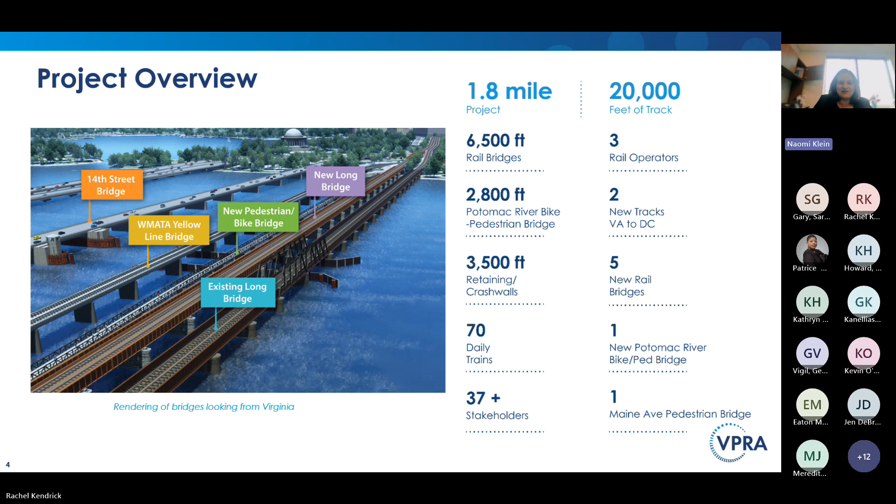This project starts in Arlington, and ends just south of L'Enfant Station, expanding the rail corridor to 4 tracks. South of the Long Bridge project, we have another project, Alexandria 4th track, which will expand from 3 to 4 tracks. North of the project, we have the L'Enfant Station and 4th track project, which will also expand the corridor to 4 tracks all the way up to Union Station. So you have a unified 4-track corridor from Alexandria all the way up to Union Station, and then the 4 tracks continue up the northeast corridor.

I talked about the Long Bridge across the Potomac River, but this project is actually more than that. It's actually 5 rail bridges and 2 bike or pedestrian bridges. Going over where those bridges are: we've got a bridge over George Washington Memorial Parkway, over the Potomac River, over the I-395 highway, over Ohio Drive, the Washington Channel, Maine Avenue, and then ending just south of L'Enfant Station.

Because of the size and scale of this project, it is broken up into 2 packages for construction. There is a south package, and that will build everything that is in Virginia and the bridge across the Potomac River. The south package ends right as you enter East Potomac Park, closest to the water. The south package will also build the bike pedestrian bridge. That package is a design build contract. The design builder started at the beginning of this year, and construction is estimated to start in the middle of next year.

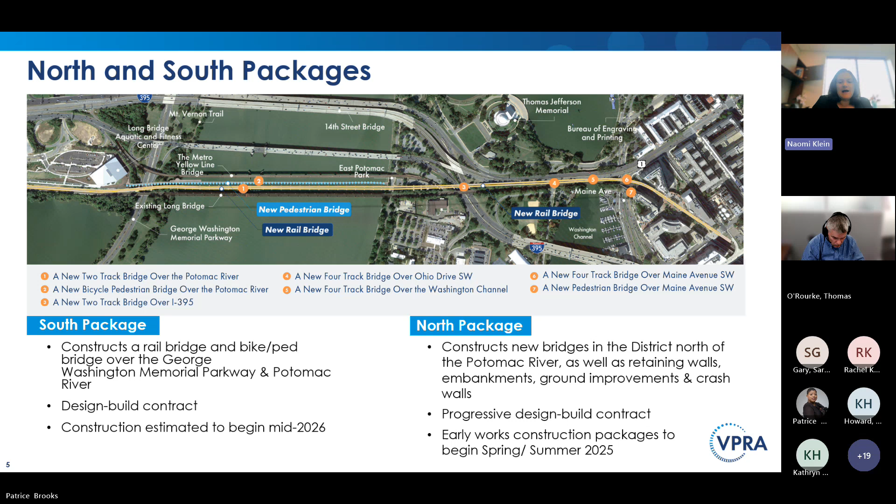The north package, which is what we are here to talk about today, picks up in East Potomac Park right by the water, and continues the project north over I-395, over Ohio Drive, and the Washington Channel, over Maine Avenue, and then through the Maryland Avenue overbuild, where it ends at LE Interlocking. That north package is progressive design build. We are currently in final design, and we are starting early works construction packages. We're not building any of the actual rail infrastructure yet, but doing early work that will help us get ready for full construction. The full construction work is expected to start next year, and those early works packages are starting now.

We have a lot of stakeholders. For those of you who live in the DC metro area, you know our federal partners are all around us. Additionally, because this project is between DC and Virginia, we work with both our Virginia partners and our district partners, so District Department of Transportation and VDOT. We also work with our rail operators, Amtrak, VRE, and CSX, and FRA, the Federal Railroad Administration. We also work with bike and pedestrian advocates in the district and Virginia, and we have design oversight by the National Capital Planning Commission and the Commission of Fine Arts. Then we get permits from many of the federal entities listed here, and state.

This project is a huge value add for the district. We've already talked about one of the biggest things, which is the new bike pedestrian bridge over the Potomac River. The current path across the Potomac River is attached to the 14th Street Highway Bridge, and it's 7.5 feet wide. The new dedicated bike pedestrian bridge will be 16 feet wide, more than double the current path. In addition to that bike pedestrian bridge, we're adding additional safety and security features. We're improving the vertical and horizontal clearances of many of the rail bridges. This is important because low bridges carry a higher risk of bridge strikes from large vehicles like trucks and freight.

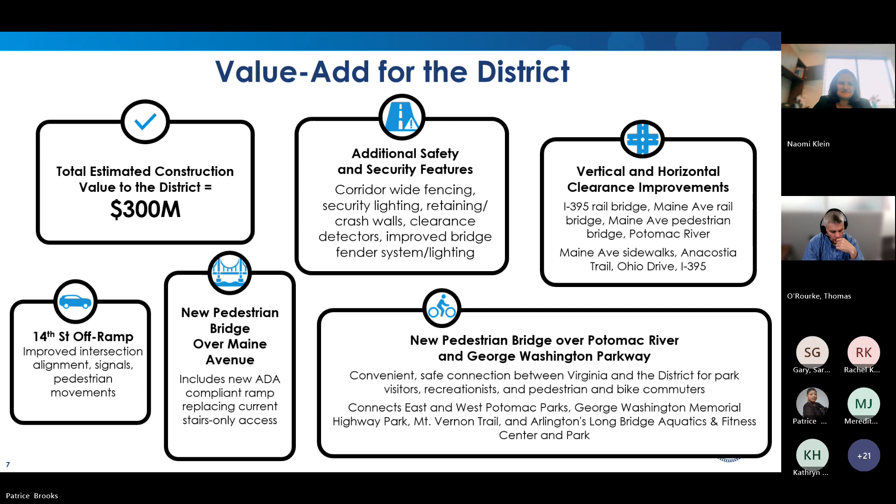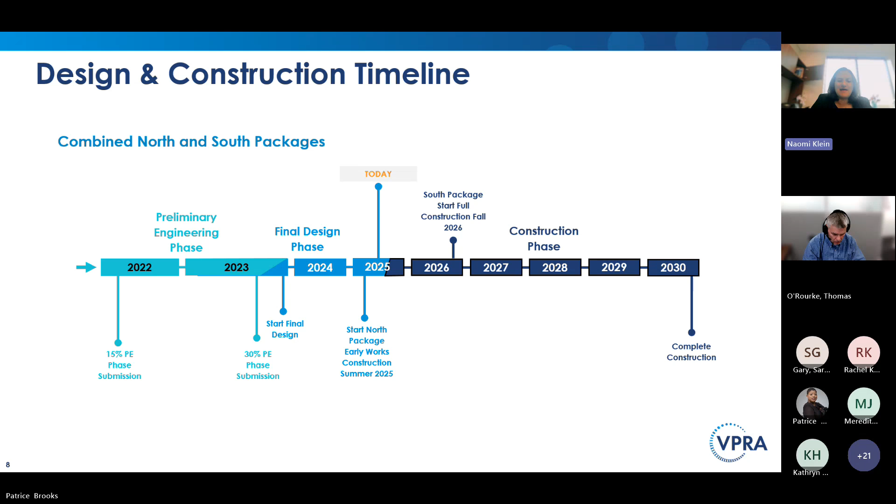This is our design and construction timeline, showing where we've been and where we're going. In 2022, VPRA became the lead on the project. Prior to that, DDOT was the lead on the environmental document, working in partnership with the Federal Railroad Administration. In 2023, the design of the project was taken from 15%, considered conceptual design, to 30%, which is preliminary engineering. Then our progressive design builder came on board and is taking that to final design, expected by this fall. We're doing early work starting now, spring and summer, with full construction estimated to start towards the middle of fall next year, lasting 5 years through 2030.

Next slide, please. This is just to show you that we are fitting a lot of infrastructure into a very small space. From left to right, you'll see the existing WMATA bridge. That green box above it is their air rights, so we cannot put any structures within their air rights.

Next to that, you'll see our new bike pedestrian bridge, 16 feet wide, more than double the current connection. That bike pedestrian bridge connects in 3 places — 2 on the Virginia side, 1 on the DC side. It connects with the Long Bridge Aquatic Center Trail, the Mount Vernon Trail, and in DC, the bike lanes on Ohio Drive in East Potomac Park.

There is a ramp down to the Mount Vernon Trail, which is ADA accessible and also very easy for bikes to use. Then 25 feet away from the bike pedestrian bridge is the new rail bridge, and 25 feet away from that is the existing Long Bridge, which will continue to be owned and operated by CSX.

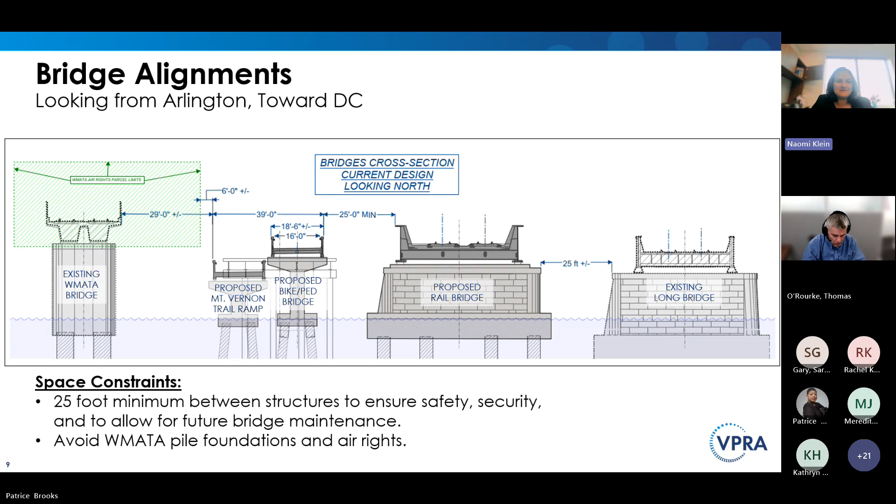Next slide, please. This shows you some renderings. On top is the existing Long Bridge, which is over 100 years old. On the bottom, the existing bridge is on the left next to the proposed new bridge on the right. The aesthetics of these structures are reviewed and approved by the Commission of Fine Arts and the National Capital Planning Commission.

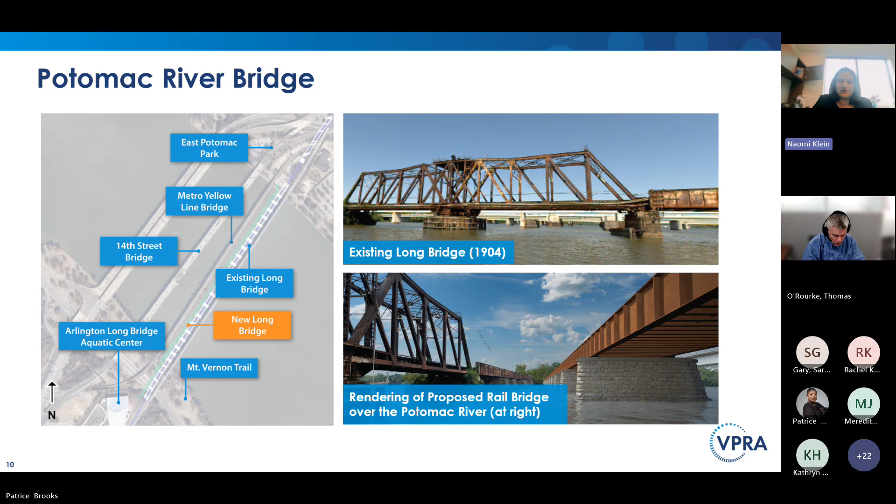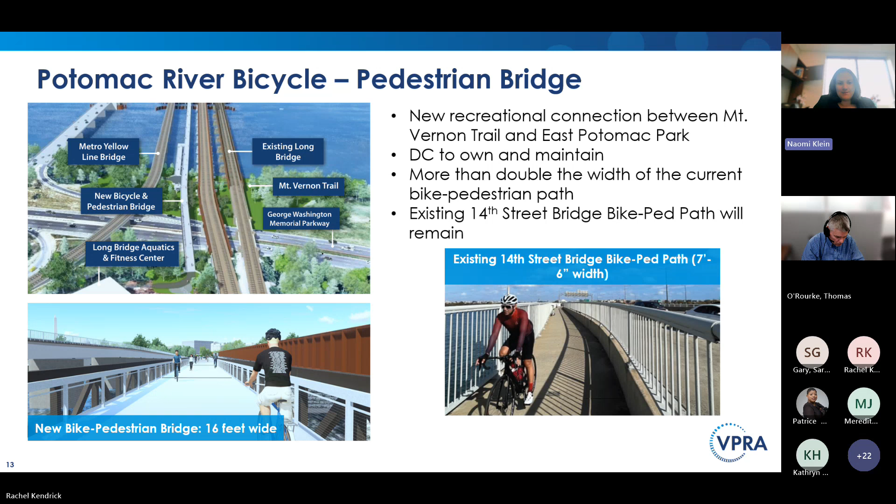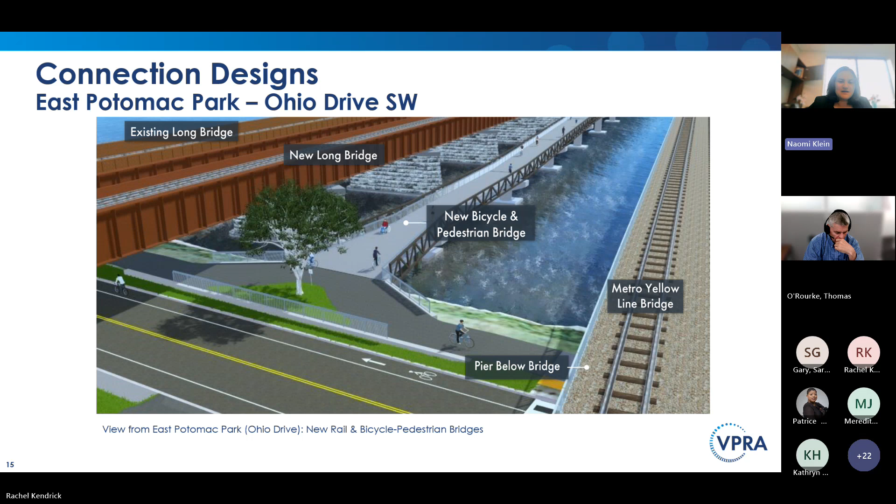There is a pedestrian bridge over Maine Avenue. That bridge used to be a rail bridge leading to a rail yard, which is now the Maryland Avenue overbuild, where you'll find the Salamander Hotel, formerly the Mandarin Hotel, and the Portals development. When the Maryland Avenue overbuild was developed, that rail spur was turned into a pedestrian bridge, I believe back in about 2007.

That bridge is right in the location where the new 2 tracks of rail need to go, so it will have to be removed. But we are planning to replace it right next to the new 4-track rail bridge. That bridge is privately owned by the PPIA, the Portals Public Improvement Association, a nonprofit made up of business owners on the Maryland Avenue overbuild. We've worked closely with them, the National Capital Planning Commission, and the Commission of Fine Arts on the design of the replacement pedestrian bridge.

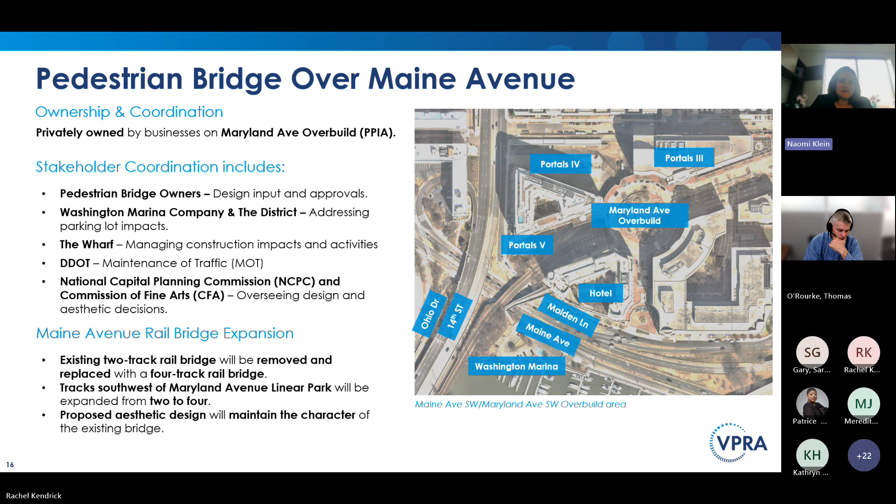This shows the new 4-track rail bridge from an aerial view, and the new pedestrian bridge over Maine Avenue. One distinction worth making, since it can be confusing: the bike pedestrian bridge we're building over the Potomac River does not connect to this pedestrian bridge. They are two entirely separate structures. The only reason we are building this pedestrian bridge is because we have to remove the existing one. It's unrelated to the new bike pedestrian bridge over the Potomac River that lands in East Potomac Park—this is a completely separate structure that just brings you across Maine Avenue.

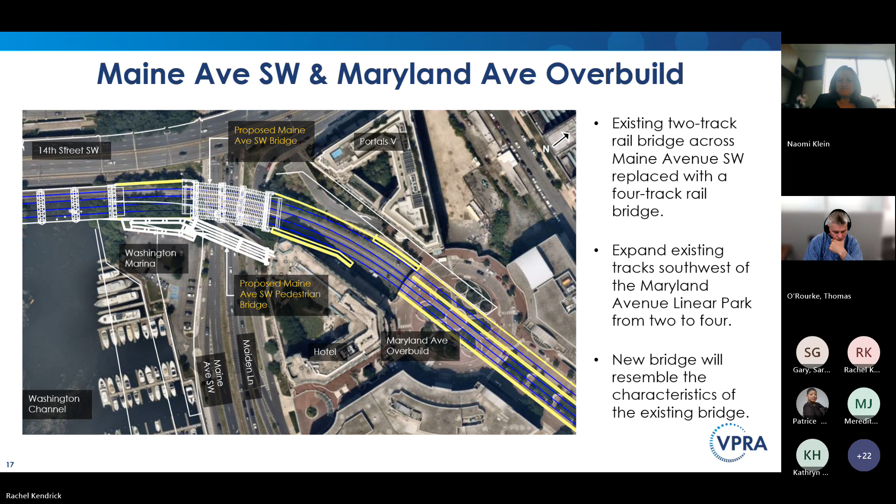This shows what the new pedestrian bridge over Maine Avenue will look like. As mentioned earlier, currently the landing of this bridge near the Washington Marina parking lot on Maine Avenue only has stairs and is not ADA accessible. Because we are replacing it, we are including an ADA accessible ramp, as well as stairs for people who want a shorter, more direct connection. This does require a little bit of land acquisition from the Washington Marina parking lot, so we've redesigned that parking lot to ensure they keep the same number of parking spaces as before.

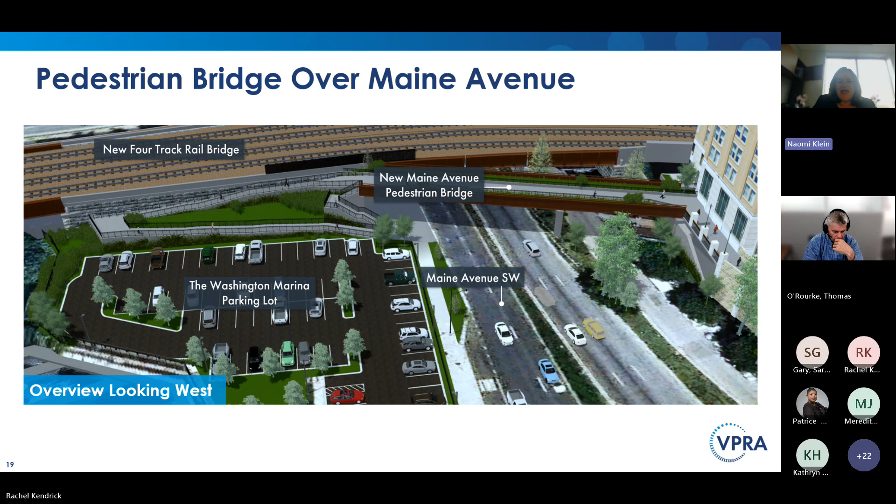This is a rendering of what it will look like from the new Maine Avenue pedestrian bridge.

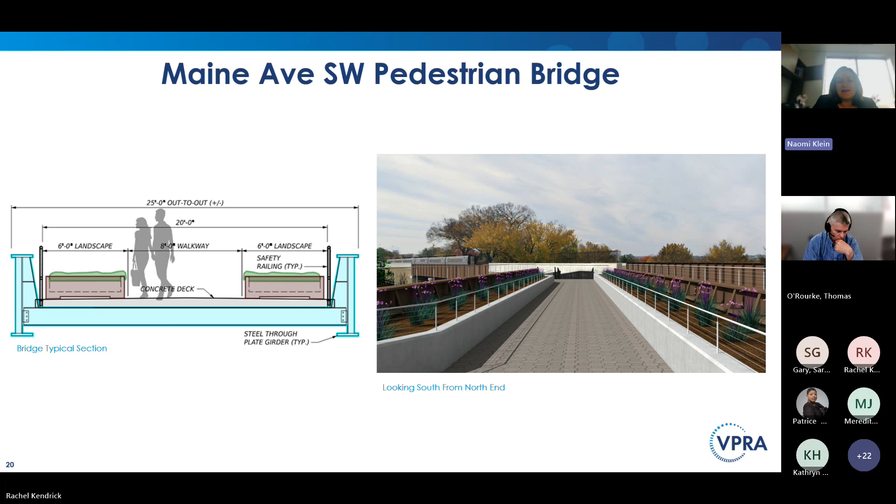This bridge is highly used during cherry blossom season. We've included the same planter boxes that existed before, but the bridge is also wider than the existing pedestrian bridge.

So what is happening now in the area? We are doing archaeological testing, vibration monitoring, borings and test piles. Essentially, we're testing the soil to help inform the final design to make sure the bridge will hold up for 100 years, which is the service life of the bridge.

We are doing tree and brush clearing. These are the early works I was referring to that help us prepare for construction next year.

We are also working on our traffic plans. We are building something in a major urban area, and we have to build structures over roadways, so we can't do that without some amount of disruption to traffic. We work closely with DDOT and our other partners to make sure those plans are as least disruptive as possible.

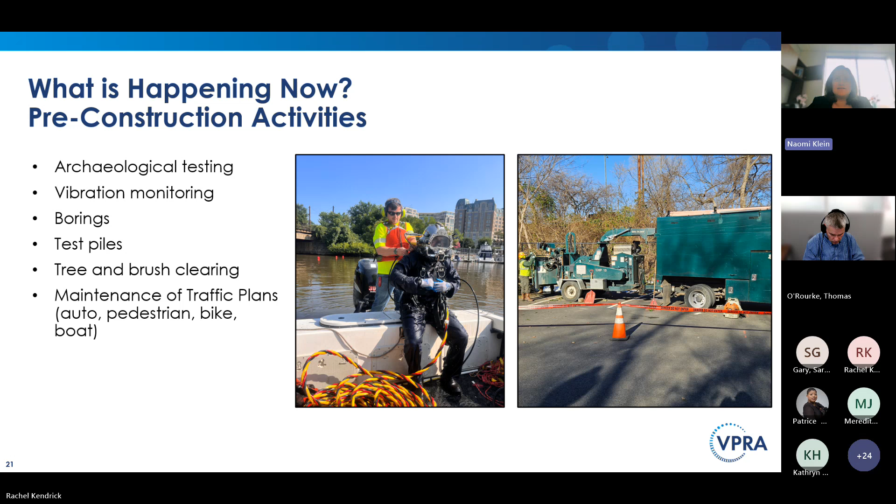On that topic, stakeholder coordination: we coordinate very closely. You saw many slides before with a visual of all our stakeholder logos. We have many stakeholders that we work with on a regular basis.

We have weekly and monthly meetings to make sure we have clear communication about what's going on throughout the course of the project as we get closer to construction, including regular meetings with rail operators, DDOT, the National Park Service, and adjacent property owners. These are all stakeholders we've been meeting with regularly for years to make sure that when we get underway with work, there are no surprises.

Obviously, we will never 100% reach every person who will be impacted by the project, but it is our goal to make sure the information is out there and that we've been coordinating throughout the entire process, every step of the way. Some of the topics we meet about, not comprehensive: traffic and travel flow, noise and vibration, the structures themselves and their design, utilities, inspections and permits, and adjacent projects and special events.

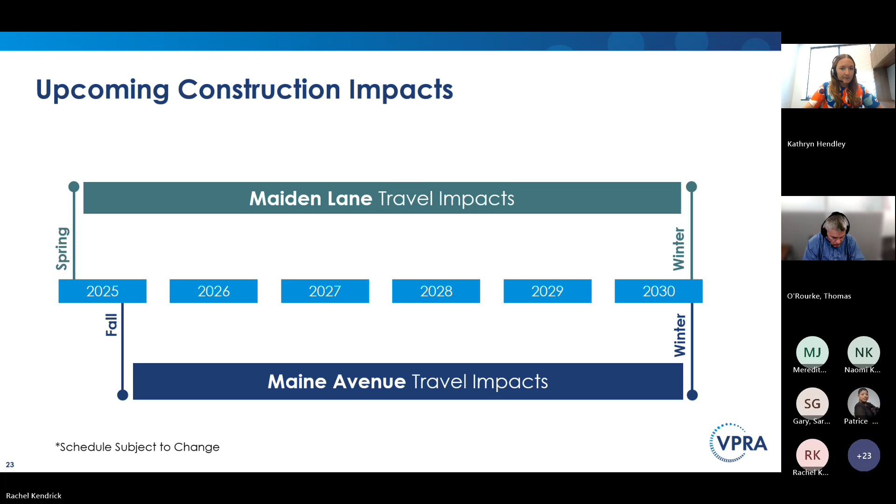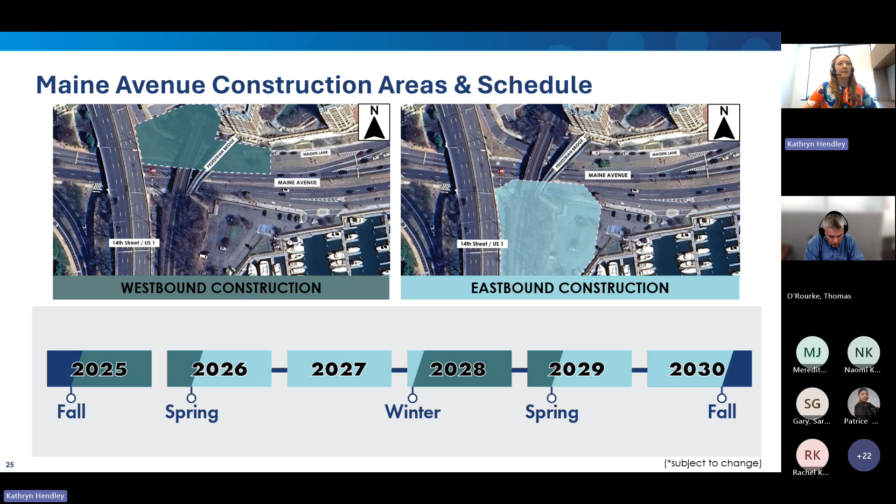The schedule at the bottom of the slide associates the colors of the construction areas with the approximate timeframes of when these phases will be under construction. Construction for the dark green westbound zone will start later in 2025 and run until spring 2026. Then we will flip to the eastbound construction zone, which will be in place until early 2028. In early 2028 we will convert back to the westbound zone for approximately a year until 2029, and then again convert back to the eastbound zone. We'll be flip-flopping in order to construct this very complex Maine Avenue rail bridge and pedestrian bridge.

The big picture goal of implementing these changes to Maiden Lane and Maine Avenue is safe access for motorists, bicyclists, and pedestrians throughout construction. This is a very busy corridor, so our goal is safe access for travel to the Salamander Hotel, the Washington Marina, the Portals, and the passenger rail and freight corridor, as well as streamlining construction and minimizing impacts as much as we can.

A few other things to note: there will be a need for occasional nighttime lane closures and weekend detours throughout the project. A portion of Maiden Lane will be closed to maximize safety during construction, and the northbound 14th Street ramp will be closed for limited periods. Importantly, pedestrian access will be maintained across Maine Avenue throughout construction. We will build a temporary pedestrian bridge slightly further east from where it is today, closer to the marina entrance, but pedestrian access will always be maintained from the Salamander and Portals to the marina parking lot area.

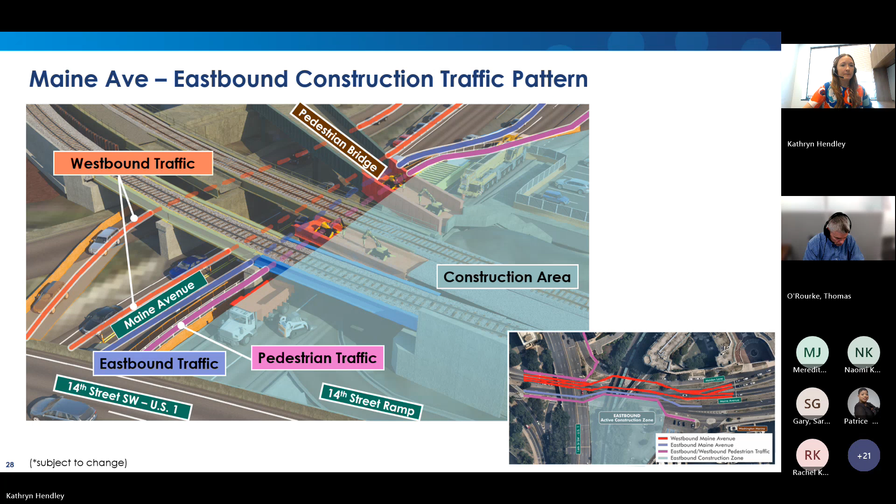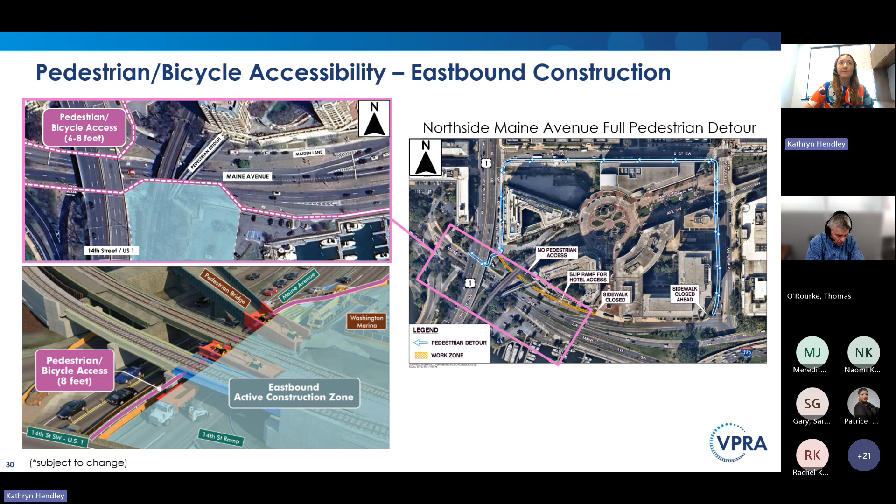First and foremost, there will be continuous pedestrian access throughout the project. Pedestrian access will always be at least 6 feet wide at all times, and along the eastbound roadway, the bike-ped access will actually double during the cherry blossom season. As mentioned, this sidewalk is part of the Anacostia Riverwalk Trail, and we know that bike and pedestrian traffic in this area increases substantially during cherry blossom season, so we will be doubling bicycle and pedestrian capacity during that time.

To sum things up for both the westbound and eastbound construction zones and traffic patterns we walked through today: the lines on the graphics represent the number of travel lanes in place during each construction phase. Red lines are westbound Maine Avenue travel lanes, purple lines are eastbound travel lanes, and pedestrian routes are shown in pink. In the westbound construction phase, shown in dark green on the left, we will maintain 2 travel lanes in both directions. In the eastbound construction phase, shown in teal on the right, we will maintain 2 lanes westbound and 1 lane eastbound. There will be continuous pedestrian access throughout both phases of construction.

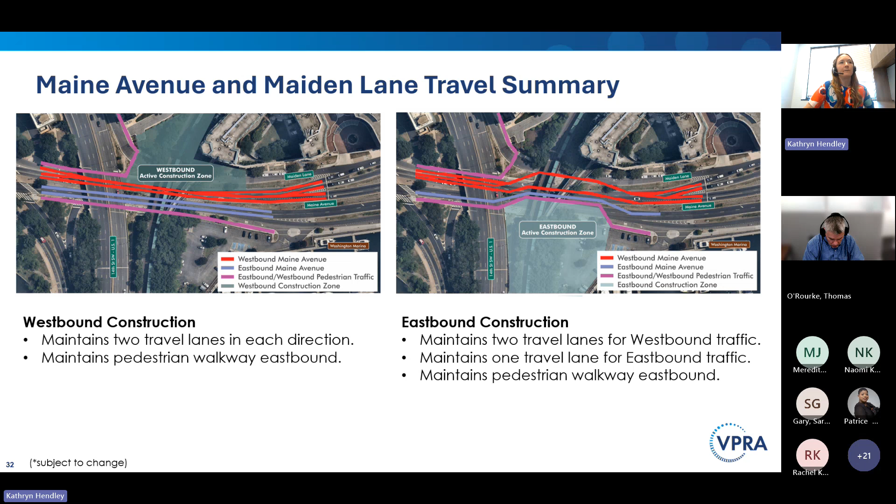There are a number of work zone mitigation measures that go into planning this type of complex project. It starts with a comprehensive transportation management plan that looks at all facets of constructing the project and plans the phasing to maintain traffic, bicycle, and pedestrian access. This plan analyzes the impacts of construction on the transportation system and develops a streamlined, minimized way to complete the work. Our design builder for the Long Bridge project has completed the first version of the transportation management plan, and it is a living document that's regularly updated as conditions change and more information becomes available.

We're coordinating closely with DDOT on these traffic changes and construction impacts. We have weekly coordination meetings with DDOT to discuss submittals and upcoming work, and we will continue this coordination throughout construction. The design builder also developed a traffic incident management plan to streamline responses to traffic incidents. Throughout construction, we'll be monitoring traffic operations and safety, reviewing work zone setups, noting any crashes, and monitoring queue lengths and travel times. We will continue close coordination with DDOT to request signal timing changes and traffic data throughout construction so we can be proactive in minimizing travel impacts.

We'll also proactively perform public outreach to ensure the public is informed well in advance of any traffic changes associated with our project. Finally, we know there are a lot of construction projects happening simultaneously in this area. There are over 15 different infrastructure projects underway near the Long Bridge project, and we coordinate regularly with these projects through an ongoing adjacent projects meeting, where we share design and construction information to ensure we're minimizing construction impacts to the public throughout the corridor.

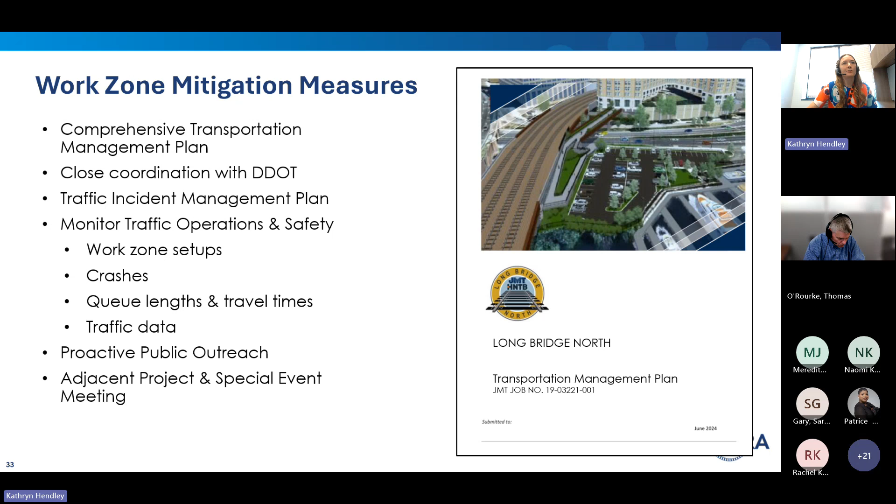The Long Bridge team is committed to doing everything we can to minimize disturbances such as noise and vibration during construction. There are quite a few mitigation measures that we'll use that you can see here.

We'll follow the district's noise ordinance and make every effort to limit work at night, both for noise and safety reasons for our workers. We'll regularly monitor noise levels to make sure we're staying inside the established limits, use whisper quiet generators with lower decibel levels and backup alarms that regulate volume, monitor vibration to make sure we're not impacting adjacent buildings, and wherever possible, use drilling equipment rather than pile driving to minimize noise.

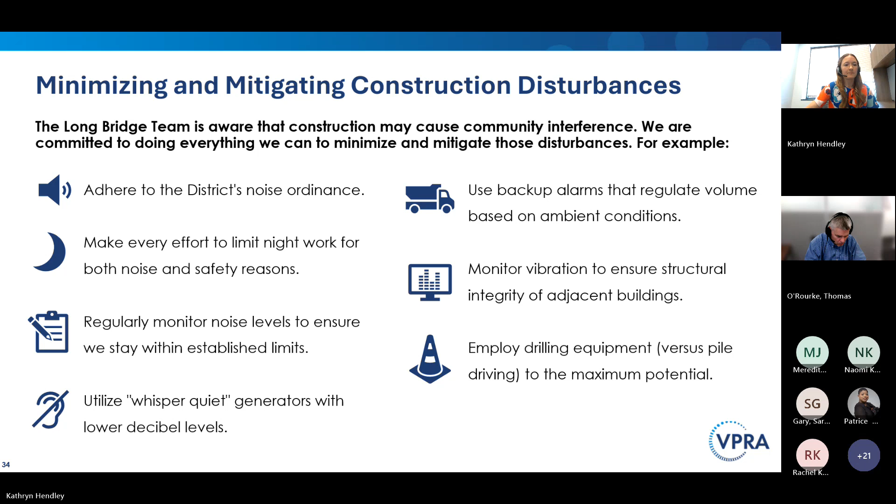Since the Long Bridge project includes work on the Potomac River and the Washington Channel, we'll make sure to communicate with the boating community about travel impacts on the water.

So this summer, there will be work in the Potomac River to be aware of. In June, our design builder will be out on the Potomac doing geotechnical borings. And then later in the summer, the design builder will be driving test piles out on the river. So you'll see several barges with equipment out on the Potomac.

The navigation channel in the Potomac River will stay open throughout construction. There might be minor encroachments to the navigation channel and periods when the navigation channel shifts under another span, but it will be open throughout construction.

We don't have any work on the Washington Channel planned for this summer, but when work does start over the Washington Channel, both the Washington Marina and the Marina parking lot will still be open. There will be buoys to guide marine traffic, and the entire Washington Channel will be a no-wake zone.

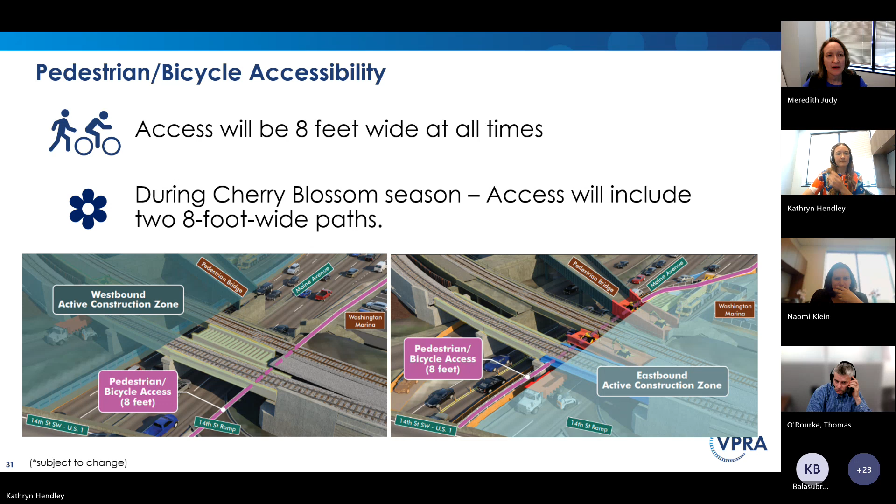How many vehicular travel lanes are being maintained? When we are working on the north side, we're going to go from 3 lanes down to 2. So there's still space. DDOT has requested that we maintain 2 westbound travel lanes at all times, and we did counts here. There are pedestrian counts. We did not have a high volume of pedestrians that walked under here.

It's also not an ADA accessible sidewalk. So this is the problem. DDOT created an ADA inaccessible sidewalk, and then they're justifying closing the sidewalk completely because the sidewalk isn't accessible, while maintaining multiple travel lanes throughout. This is the type of garbage that they do. Just put yourself in the position, like, think of yourself as someone who uses a wheelchair. Is this really acceptable to you?

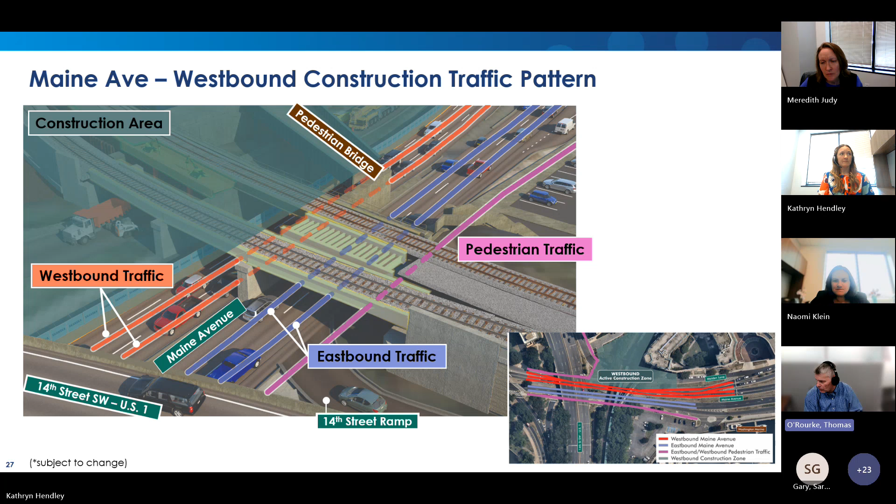No, I think what's being asked is if you're heading westbound on Maine, and you go underneath the structure that is kind of like a tunnel - well, it's the pedestrian bridge, but okay - and you turn left. You turn left, and you're turning left onto what is essentially Maiden Lane, in front of the Salamander. And you continue underneath the pedestrian bridge, underneath the railroad.

Can you get on 395? Yes. Okay, so the answer is yes, that will remain open. It will remain open.

Go through some slight modifications to accommodate the construction. Okay, all right, thank you.

That's great. My second question is one I raised at the last meeting at Southwest BID, and that is coordination with DDOT. I'm happy to see you're planning for things around the Cherry Blossom Festival. However, it's really critical there is coordination with DDOT on other events at the wharf, such as the Holiday Parade of Boats, Mardi Gras, and Pride. If you're changing signalization on Maine Avenue to move cars through, we have to ensure pedestrians have sufficient time to cross when we have these large cohorts of people coming to and from the wharf.

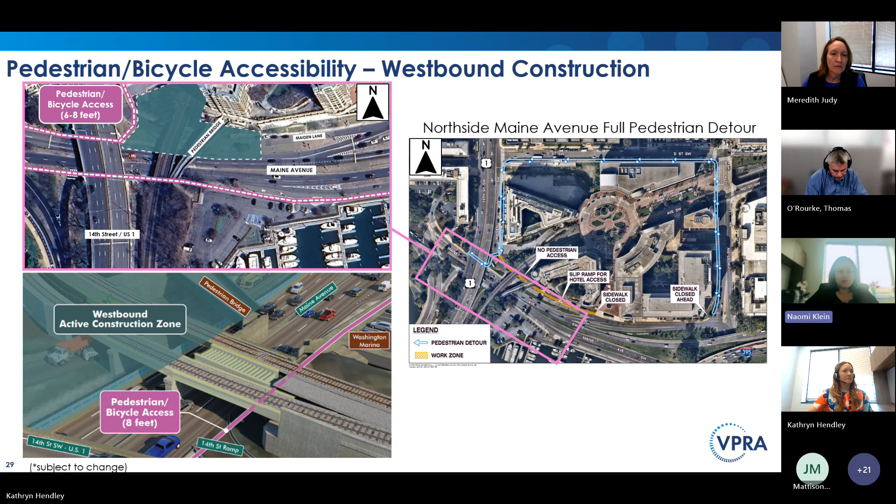It's between where the Washington Marina is and the tidal basin. If we can go back to that slide, that's where the sidewalk narrows down to 11 feet. We're pushing that wall back, and we'll be able to expand the sidewalk to 24 feet on the south side by the marina.

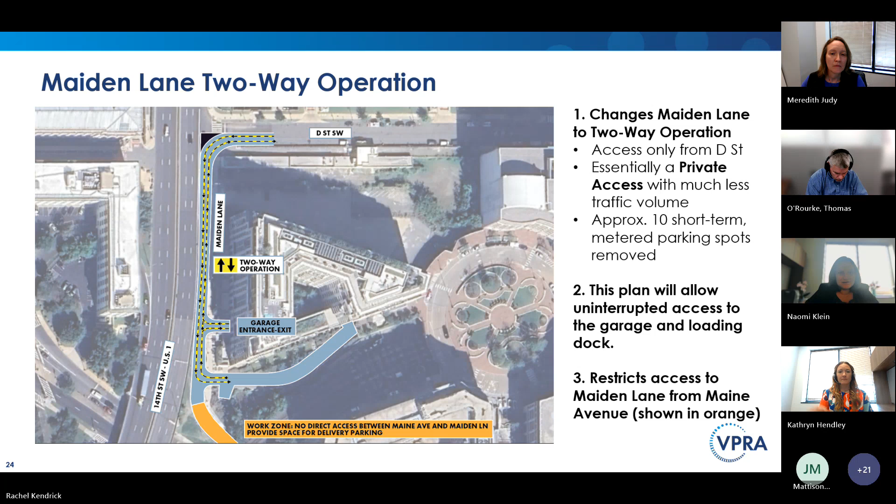I think we're going back to where that visual is. We've got to keep going back though. Not keep going, keep going. I'll tell you when we get there. So does that keep going?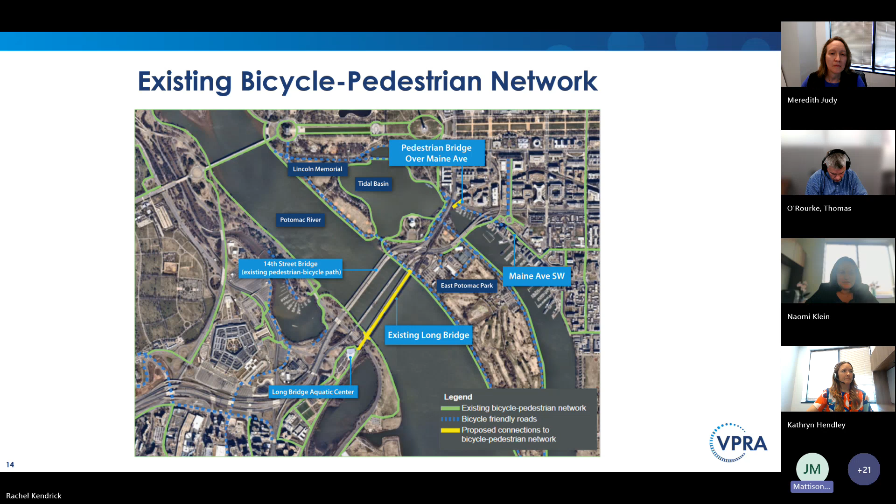So the expansion basically goes until you get to the marina parking lot, and I believe the sidewalk does widen at that point. I'd just encourage you guys, as you're talking to DDOT, to look at where that narrows, and if DDOT can pitch in with some solutions a little farther back where the sidewalk begins to narrow, because I feel like this is a huge opportunity. We'd be happy to have that conversation with them.

I'm looking at it now, trying to figure out what is the width. The road is not very wide at all when 395 comes out to Maine, and that's part of the problem. There's a street lamp, infrastructure right there, that actually makes it very hard to move and widen the sidewalk itself, or work around. Got it, that's definitely something we can raise to DDOT.

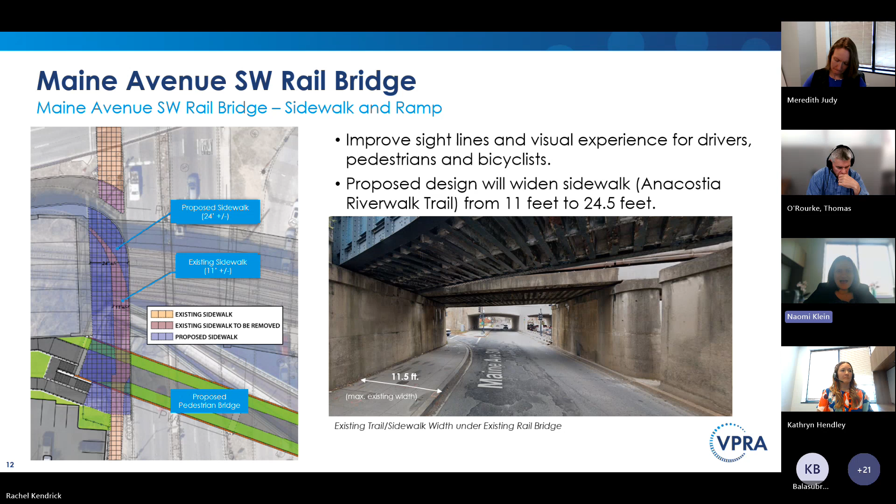I do not have a map of that. Tom, if you want to speak more to that. As far as improving the existing sidewalks, that's pretty far outside the scope of this project. But we are adding some sidewalk where there isn't currently.

I'm just making it clear that people found in this process of community engagement that this is a glaring issue. As you know, the Park Service is doing a project right now to rehabilitate their seawalls, because anyone who's been in East Potomac Park can see that it is sinking. It was built on fill. So they are rehabilitating, currently doing the area around the tidal basin. I know they have plans to also do East Potomac Park, but I don't believe that portion of their project is currently funded or scheduled, though it has been planned.

So they are - I can tell you it's many years out. We're happy to stress it with them too. And just thinking outside the box, there's parking, there's lane miles there, and it's really like a recreational area. There doesn't need to be that much car infrastructure. They really could repurpose some of that just to make a safe place for people to walk and roll.

But thank you. Yeah, thank you. Meredith, we did have one question in the chat, I just want to make sure that we address it. Yes, and if anyone needs to go while we're finishing up, that's okay. But yeah, I'd like to address the final question.